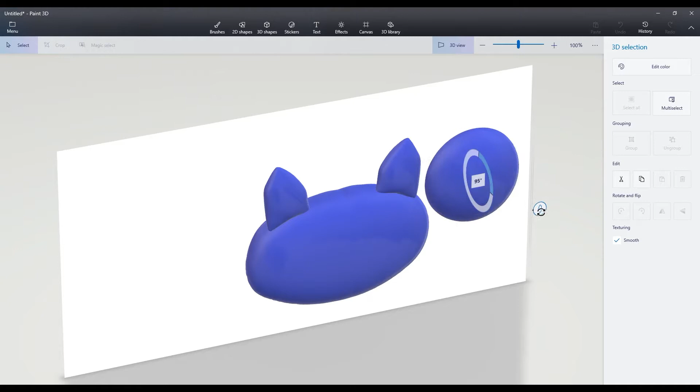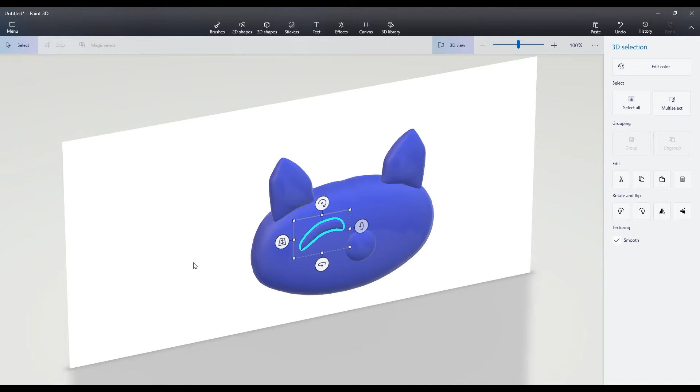Rotation, okay, snapping tool for rotation, it's great. Put it here, I cannot see that, I have to move it. Let's go back to regular position. It's quite big. What kind of eye will I decide to create? I don't know. Okay, it's good for me. Can I rotate it a little bit? Okay, it's good for me.

So we'll duplicate it, we'll do a mirror. Second eye, good for me. Maybe I will create his mouth. It will be a happy one. No, like this, a disappointed cat. Okay, with that, smaller. It's quite okay for me, I think. Yeah, it's quite okay for me.

So what will I do? Maybe a sticker, maybe a brush. I don't know what to do, to be honest. I don't want a canvas, removed it, okay. Sticker, no sticker for the moment. 3D shape, 2D shape, no. So brushes, I will paint on it. Add a color, no I don't want. I will go with the yellow.

Polished metal, yeah why not, we will go with that. It's much better like that with the brush. So maybe I can... no I can't, I have to do everything. Oh, I'm almost killing Paint 3D. So we will go with that one again. Okay, it's fun for the screen, but we don't care about the color for 3D printing, so it's okay for that.

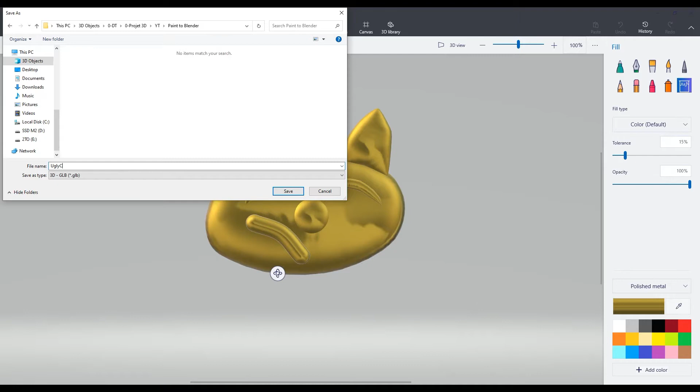So I will go to Save As, 3D Model. I have the choice, GLB or 3MF. 3MF is more for Windows software, so we will go with GLB in order to work with Blender. So I will save it to Paint to Blender. Okay, ugly cat head, Paint 3D. It's okay, I will save it and we will go to Blender.

Okay, now that I am in Blender, I will prepare my scene. So deleting everything. Units, I don't want to have a unit system, I know that it will work in millimeters. And I will import the GLB. Go back to the folder, and bam. We can see that we have a new collection with a lot of things, so we will have a look at everything in order to understand what is what.

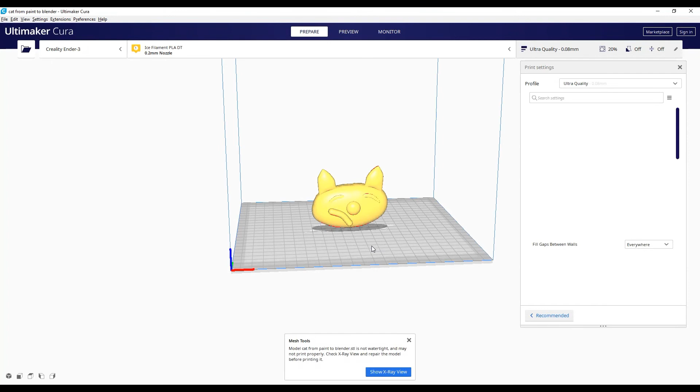And as you can see, you have the object with the size that we decided to apply. And then you will do your rotation, you will do what you want. Maybe we will print him like that, we will add some support, and we will go. So we will try, we will see if it's a printable object or not, we will generate support, we will slice it.

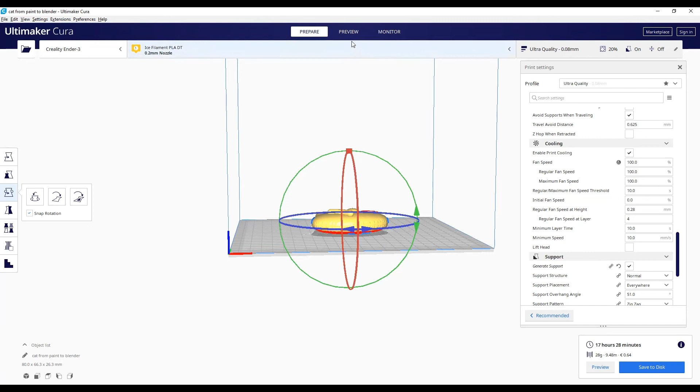We are on a high precision printer with 0.2 nozzle and ultra quality. Obviously not the kind of print that you want to do for a fun part. But as you can see, everything is okay.

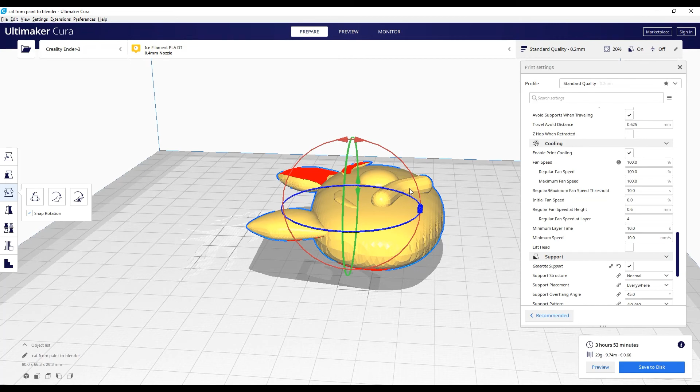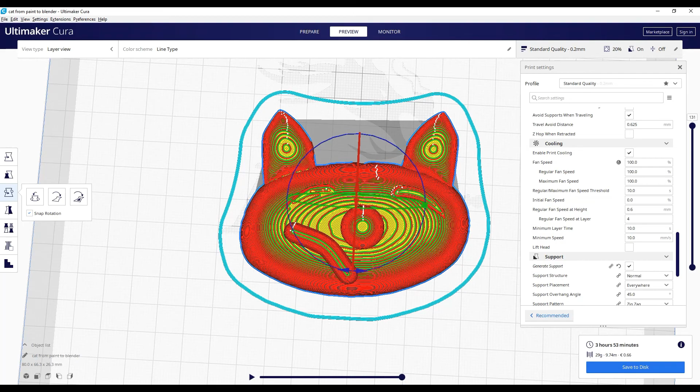So if we change to a classic and standard profile, keep the changes because we want to have some support, standard quality. We will slice it, we will have a preview, and then as you can see, the object is a printable object. It will probably not be the higher quality object, but it's something that you can print, create in maybe 5 minutes in Paint 3D, and it will take a really long time to create that in Blender if you are not a confirmed user, we will say, or if you are not really used to play with Blender. So it's a quick alternative and a good alternative to create fun objects, no precision, just for fun.

And now we go back in Blender, and the other thing that I want to share with you is that the object kept the information about the UV map, about the texture that we use. So if we now go in material preview, you will see we have the metallic gold paint that we put on the object in Paint 3D.

So you will be able to create a render, you will be able to create maybe an animation with this object. So it can be cool to have a fun object created really quickly in Paint 3D, and then you will improve it and play with this object in Blender.

Maybe if you want to do a really large scene and that you need something quickly in the background for decoration, it's quicker to create the object in Paint 3D, to be honest, than to do the complete workflow in Blender. In part 2, you will see that you can create in Blender and improve with Paint 3D. Even if Blender is really more powerful, Paint 3D is so simple that it could be really helpful.